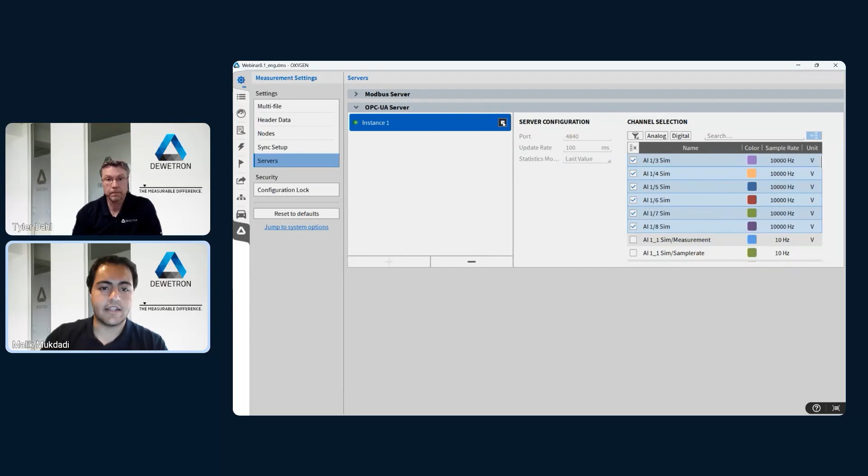Let me go ahead and get that server running again before I transition over to talk about the client features that we've integrated for OPC UA.

So here we have all of these channels actually being read in from the client side of things, and they are streamed in as if they were native Oxygen channels.

So we have a few key features here on the client side where you can set up the time to either be the client side or the server side time base. This is configurable. You can also set up the publishing interval, as you got from the server side of things, and be able to monitor whether the server is up and whether you have a good connection or not.

A couple of endpoint features for saving, loading, and exporting them. That way, if you have multiple systems you want to connect to one singular server, it's as easy as copy and pasting. There are also some security and authentication features on the client side, so if you want to be a little bit more careful about how to connect to the server, we have those options available for you.

And of course, more information on the channel selection, specifically the properties and the metadata that are available for those channels. So let me go ahead and show you how to set up an OPC UA client within Oxygen.

You'll go ahead and go over to the Data Channels tab, expand that out, and then from the bottom left where you have the Add Channel button - I have it favorited already - but if you search up and find the OPC UA client plugin, you'll be able to find where you can import or add in that software channel.

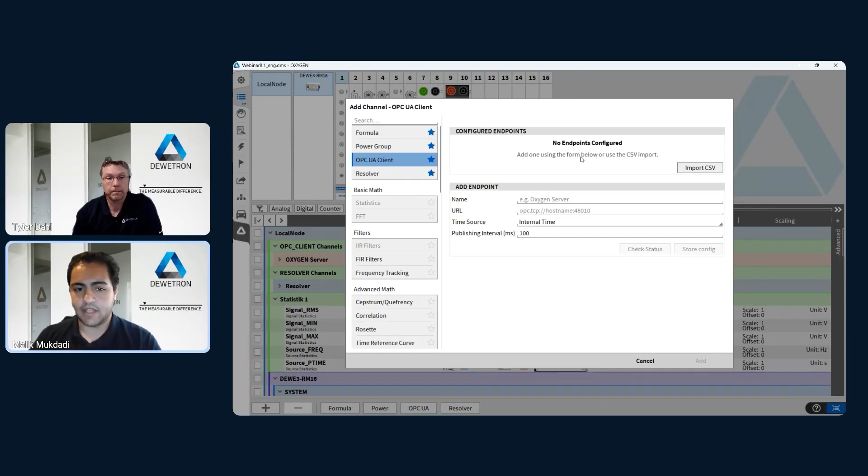Here you'll notice that I can already import a CSV for my configured endpoint, making it very easy for me to go from system to system and set up these endpoints very quickly on the fly. Or if I don't have one yet, I can manually add one myself.

So I won't go ahead and take time to type one in, as I've already had one set up here, and I'll go ahead and show you what it will look like after you add the channel.

So here I've configured it to the 4840 port that I had from the server, as well as setting up the time source to the internal time. So this is the client side time, but I can switch over to the reported time or the server side time. I've matched the publishing interval to 100 milliseconds, the same that I had on the server side.

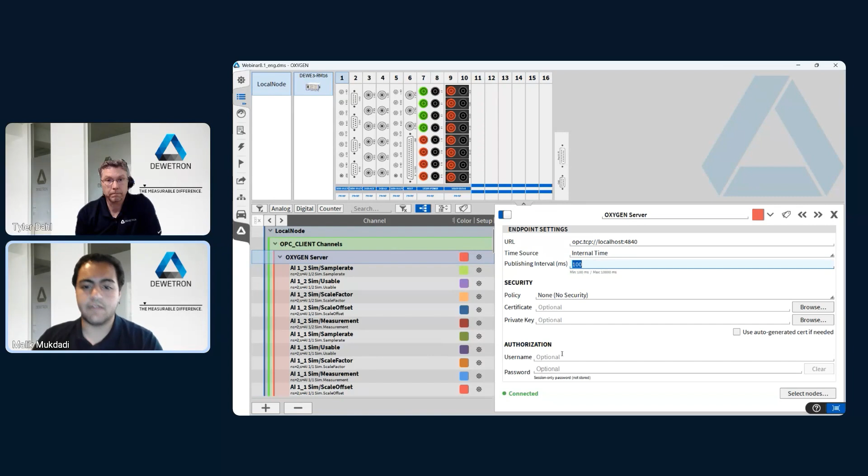And currently I did not implement any security or authorization, but these are options that you can implement if you have higher security requirements for your setup. You'll see in the bottom left here that I have a connected green status that shows me the status of the server and the client, that I do have that link there.

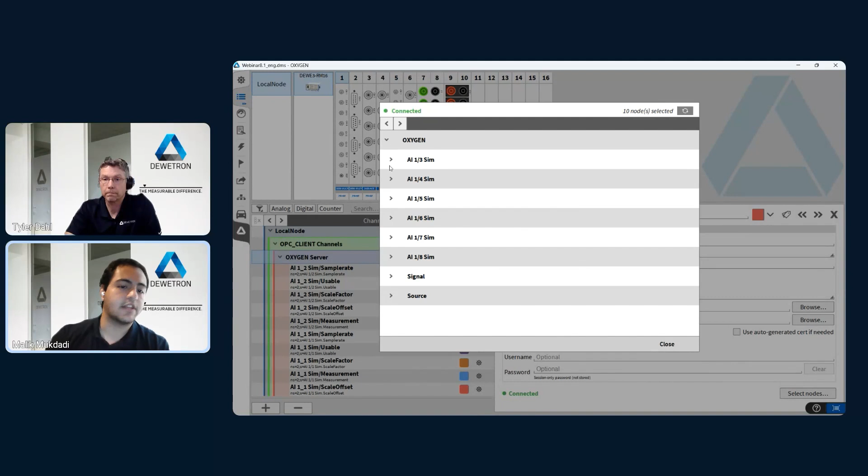And if I want to look into those channels a little bit further, I can expand out from the Oxygen. These are the channels that the server is publishing. I can look into that metadata, those properties of those channels as well, looking into the factor, the offset, the sample rate, and so on and so forth. So this is pretty exciting, seeing how we've set up both sides for the OPC UA server.

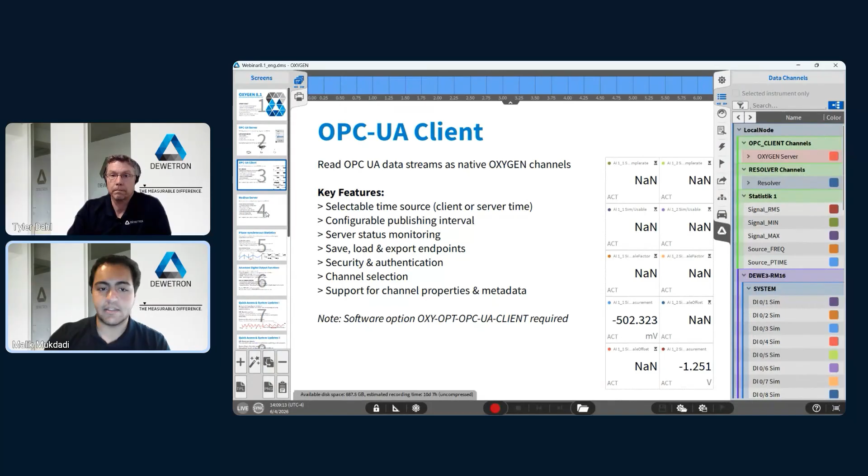We've decided to also set up, as you're familiar, we have the Modbus receiver that acts similarly to the client, and we've decided to add the Modbus server so that we can have both protocols fully supported within Oxygen.

So if you recall, over in the measurement settings, whenever I go to servers, you'll notice that I had the Modbus server already set up. And it's very similar to the OPC UA server in terms of the configuration and the channel selection tab over here, with a little bit of differences in terms of how I can configure my server.

So instead of having just a port, I also have an IP address for Modbus. I also have a buffer duration, so how long I want to wait, as well as a unit identifier, and I can save the config as much as I'd like.

One thing I would keep in mind is that the statistics mode for Modbus is limited compared to the OPC UA server, where we don't have the min-max RMS.

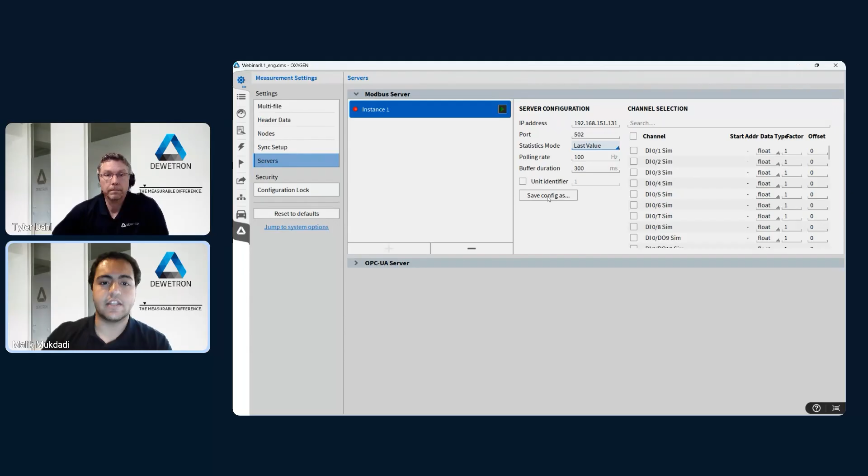We only have the last value and the average available to us for the Modbus server, so keep this in mind in terms of which protocols you want to go with for communication. We decided to offer both, as many clients from different industries utilize different types of protocols.

I think this really applies to a lot of different industries out there. Do you have any ideas, Tyler, on what industries would utilize these servers? With this extra added connectivity, pretty much any industry you can think of, even some industries that maybe we haven't traditionally been in the past.

For me personally, I'm really super excited about the OPC UA functionality. All of our Oxygen users, all the DEWETRON system users, are at some point sending information or data to their data people who are using an analytics package, a machine learning package, or something along those lines to analyze that data. A lot of those packages utilize OPC UA as a potential data connection. Now instead of having to export that data and move it manually, which is still pretty easy to do with our DEWETRON systems and Oxygen, now it's that much easier where you can actually live stream that data directly into those analytics packages.

I'm all about data, right? So being able to get that information into our Oxygen systems where you can have everything in one central location, which we're really good at, or out to other software packages that our users are currently utilizing as part of their everyday tasks. There's not an industry I can't think that this would fit into, honestly, Malik.

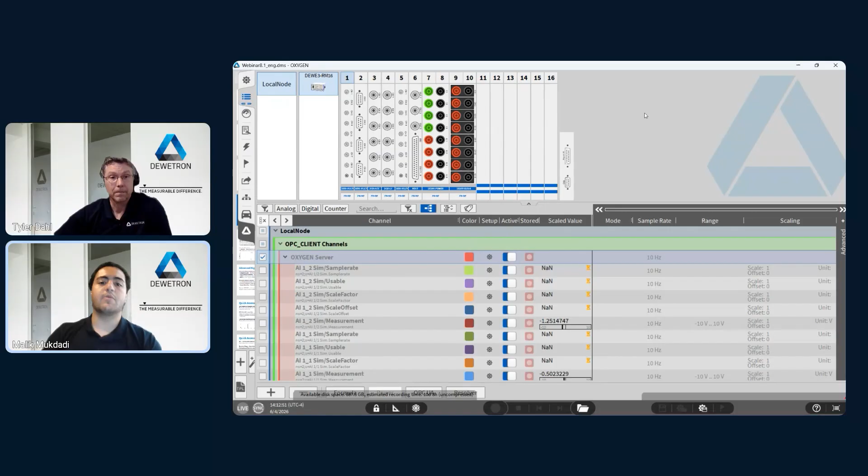That's really cool stuff, and that just shows even how much more powerful it is right there. So that was a great question. All right, so moving on.

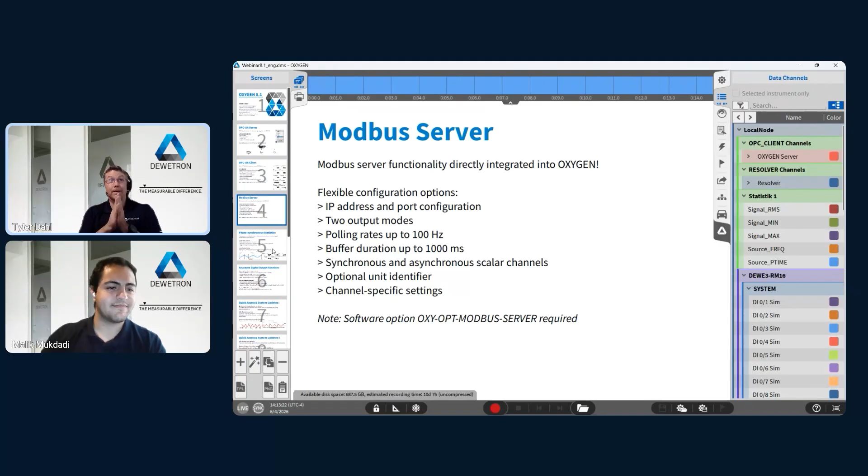Malik, why don't you tell us a little bit about phase synchronous statistical channels and also our extended digital output functions? Sure thing, Tyler. So we've decided to expand the calculations that we can do with our statistics channel. If you're familiar with that, we were using these channels to do various statistical analysis, averaging, RMS, rolling, and so on and so forth of channels.

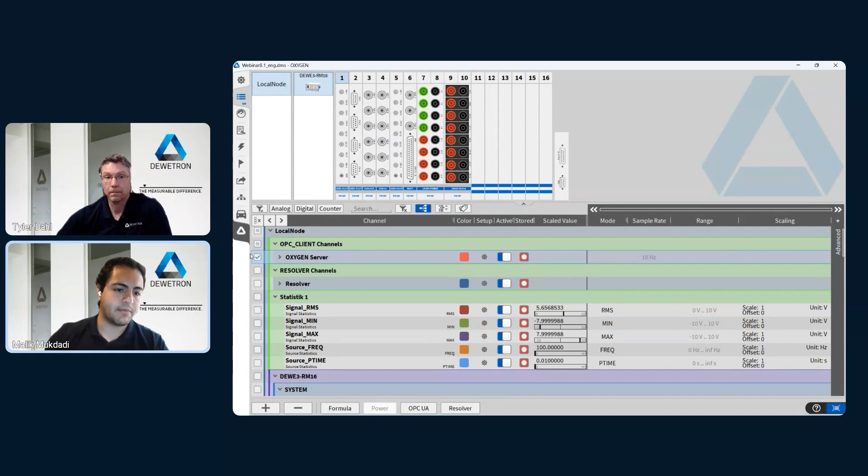We've decided to expand that over for these waveforms or analog signals that you may have, where you want to be a little bit more careful about their phases, their periods, or their frequencies, if you will. So let me just jump right into how to set that up. If I go over to my add channels, before that, if I go ahead and select an analog signal, say source, and I add a statistics channel for this...

You'll notice, if you're familiar with our statistics software functionality, that we've added two new statistics analyses. However, they are blocked off because they apply to phase locked measurements or phase locked calculation types. So what we've added here, along with all of our other calculation types, is that phase lock calculation type, where you can do all of these statistical analyses depending on the phase of that channel.

This includes being able to select a channel for the period source. In this case, I've selected my source channel.

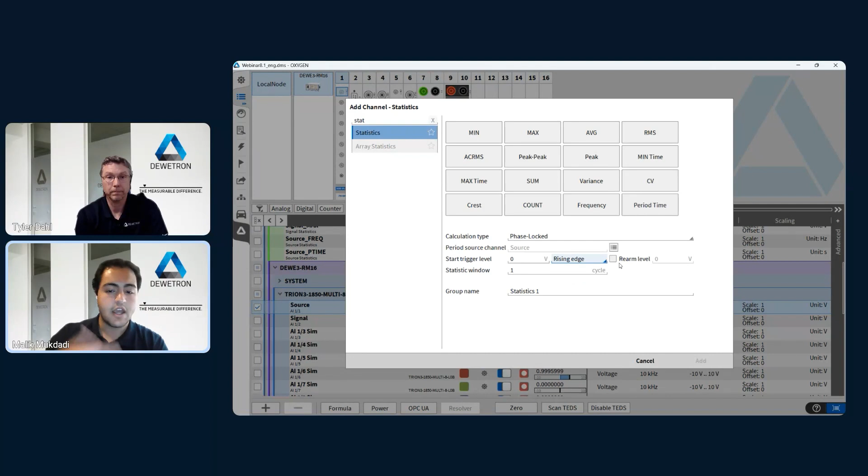As well as setting a trigger level, whether that's rising or falling edge, a rearm level for that. My statistics window, whatever calculations I'm doing, will be based off of the period or the frequency of that waveform or signal. I've already added one up here, and you can see that I can do my RMS, my min, my max, as well as read the frequency and period time for that signal.

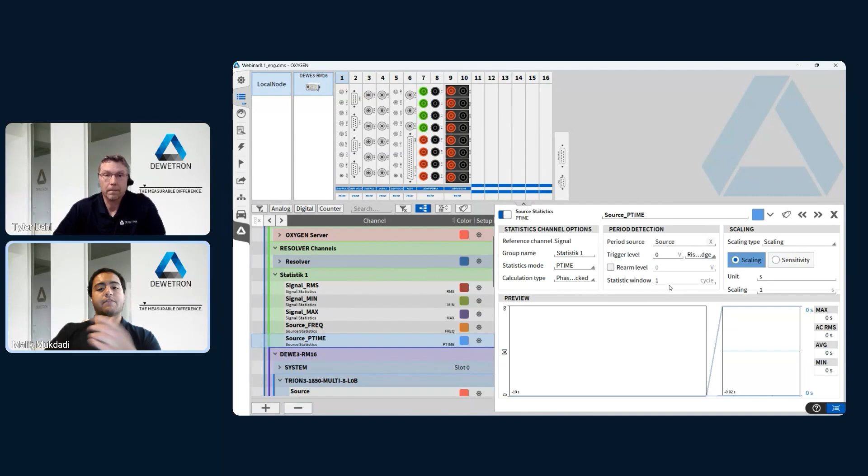And I can run that right now. I'm only running it off of one period, but if you're working with some noisy signals, some waveforms that aren't very steady throughout each period, you can do more of an averaging, if you will, across those cycles.

This is just a clock signal that you can configure from 1 hertz up to 10 megahertz. A PPS signal, so this is a 1 pulse per second signal. These are great for a few motors or a few sensors out there. We also have a dedicated clock 10, so this is a much more dedicated continuous 10 megahertz clock signal.

As well as some synchronization for IRIG-B. So if you're using IRIG-B to synchronize different systems, now you can import that or forward that signal as a digital output from your DIO on the chassis and be able to see that or visualize it as a software channel in Oxygen. We've also added the aux software channel pin available as a software channel in Oxygen, and this is where you can see that sync, the IRIG-B I mentioned previously, in Oxygen itself.

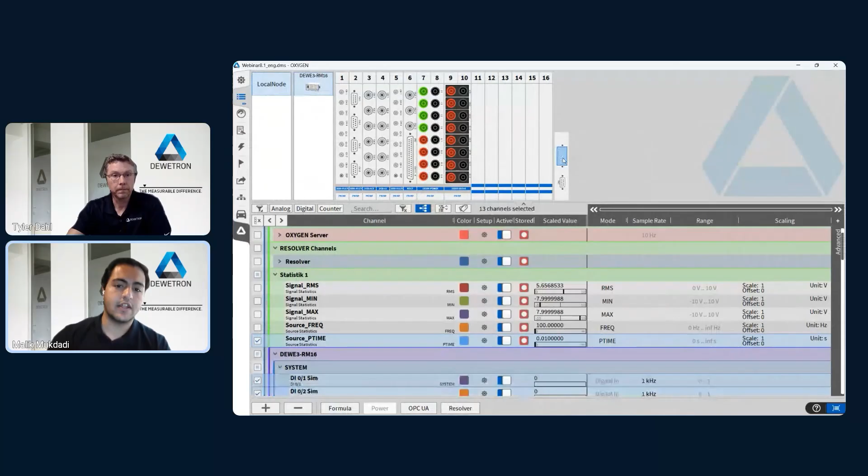So let me go ahead and show you guys what that looks like. If you go over to the DIO on the system here, you'll see that I have all my digital inputs, and then from my outputs, I've configured different modes for them. So if I go and select my setup, I can see that my modes have expanded from not just digital output, but to include those 4 modes that we've talked about.

Over here, you can see the aux channel. If I close my settings, you can see the aux channel down here with the IRIG. And if I had an IRIG signal coming in to the system, I would see that here as this channel. So now I can drag and drop it into my measurement screen very easily.

So these are the digital and analog functionalities that we've added onto our Oxygen software. I think these sound pretty cool, pretty interesting. What are your thoughts about this, Tyler? So I think it's awesome.

So with the phase synchronous functionality that we've added, we already had the ability to pull in frequency data or frequency information, but this makes it that much easier to find, making it part of the statistics channels. But also, I really like the fact that you could smooth it out now.

As a native property of our hardware, because it is such high quality hardware, especially with high speed, highly granular data coming across, you're going to get chatter, you're going to get movement across that. You're going to pick up everything, which you may not always want because it can be a bit of an eyesore to see that chatter as it's going around that main frequency you're trying to pick up. So this allows you to really smooth it out, to make it a little bit easier to work with, and better to look at as you're going through your testing.

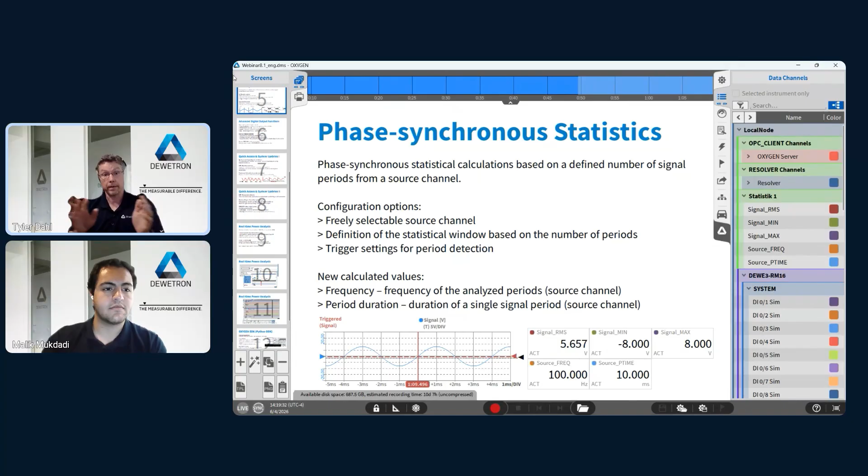And then with the digital out enhancements that we've made, this is also very cool. So now we have the ability to essentially propagate timing signals further down the chain through our system. Our systems will natively synchronize with themselves via our Oxygen Net features, but now you can actually propagate that same signal that our DEWETRON systems are utilizing to other third-party systems. So say, for example, you only had one IRIG connection.

Well, you can plug that into your DEWETRON system and then use that DO port to actually propagate it out to the next system, a non-DEWETRON system that would need that timing to synchronize those external sources with our system. So really cool stuff, and even the ability to create your own sync signals or output signals.

That's really cool too. Our team does an awesome job putting these updates out, and I'll say it again every time: Oxygen is for the user, by the user. This is all based upon your feedback. So what you tell us is what we implement into the software, what you need we try to implement as much as we possibly can. So if you ever have a feature you'd like to see implemented, improved, or tweaked, do not hesitate to reach out to us. We love to hear from you, we love that feedback, and we'd love to implement it even more.

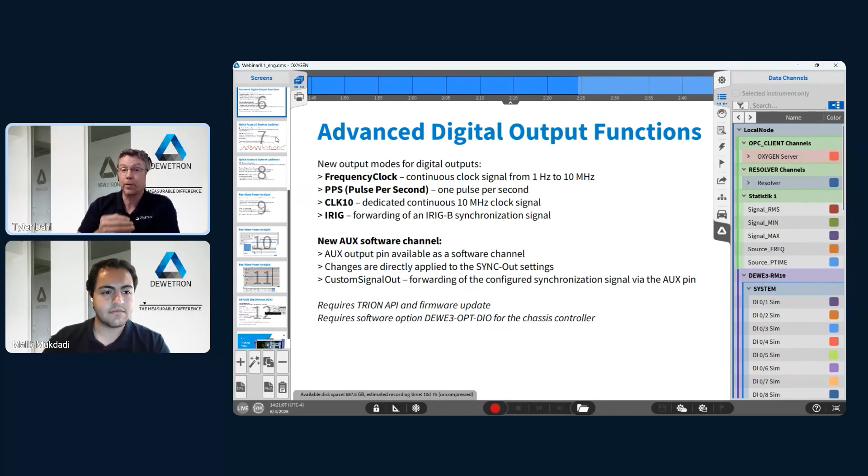So, Malik, now we're going to talk about some of the improved quality of life features we've added to Oxygen. And are you going to tell us about real-time power yet? I think I'm going to leave that for dessert a little bit later. We'll get through the quick access stuff first, and I really want to end it with a bang with that real-time power analysis. So stay patient with me, and we'll get there. Let me just hop right into it.

We've added a couple of miscellaneous quick access and system updates. Like Tyler said, Oxygen's for the user, by the user. We really want to make sure that as we continue adding all these new improvements, new ideas, new plugins that can be utilized for more complex applications, we keep Oxygen itself simple enough to interface with, so that it's more intuitive, giving you more of those 'that makes sense' kind of moments.

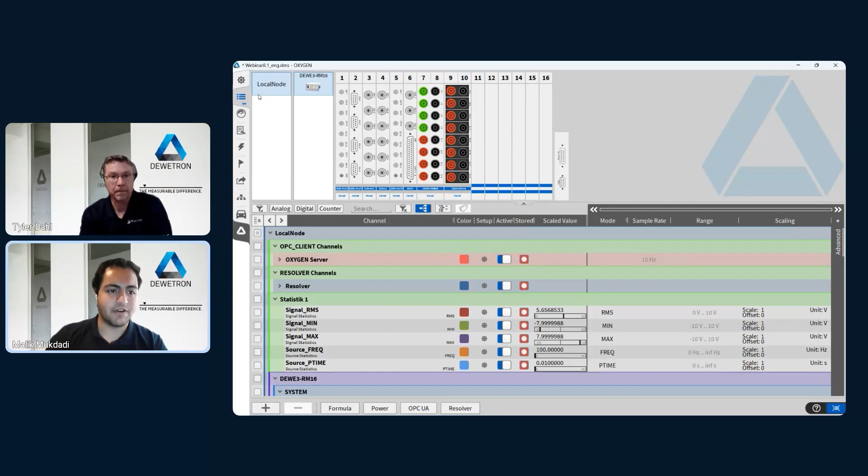So the first thing we've added, and honestly, as an application engineer using Oxygen every day, this might be my favorite: a quick access for those frequently used calculation channels. Every time you go to the add channel menu, you always have to hit the add button and then look for whatever plugin or calculation you want to do. However, if you favorite up to 4 channels or 4 calculation plugins, you will see them show up at the bottom of the channel list. So for me, whenever I'm working, I really want to keep up the flow. If I want to add a lot of formulas back to back, I now have the option to configure this quick access, this quick button that I can just click and keep moving forward. Really big for somebody who uses Oxygen very often, I like this addition a lot.

We've also now added more support for SCPI, specifically in the number of connections we can hold through Oxygen. Previously it was very much a single connection, host to client. Now we've expanded that into parallel connections where you can have multiple clients to a single host. This is really useful for those who might have automated testbed systems, multiple systems going on, or if you're even using OXYGEN-GO and want more of a monitoring and measuring at the same time to one consolidated host. We're now able to support that with the release of 8.1.

Another thing we've decided to add: if you work into the measurement screen heavily and don't like to jump back and forth, especially using recorder instruments, we've decided to display the absolute or relative time directly within the instruments. We've been expanding a lot more on the functionalities in the measurement screen and how quickly you can get the information you'll find useful. Previously you'd have to go to the recorder and look at the time format separately, and now that's integrated there. To make sure you see that time format, make sure that whenever you're setting up your recorder instrument you have the show time format button selected.

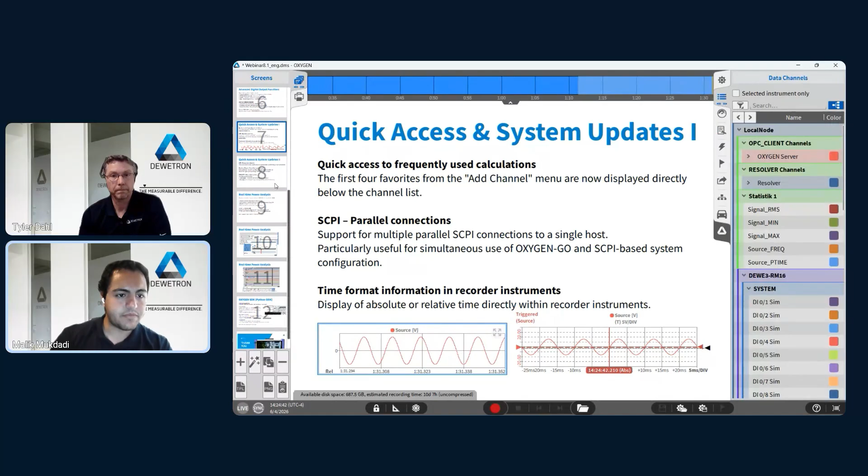We've also added a screen lock behavior. So if you're setting up an XCP connection and getting it established, now the screen lock is automatically disabled. This is a nice one for those who use XCP often. And then for our resolver plugin, we have now added a configurable filter length.

So if you're working with that velocity angle for maybe a rotating shaft, you want more of an improved signal quality, something more of a smooth speed output. This is what that filter length really helps out with.

And then, as you saw with the Modbus, we supported output modes for last value and average. We've decided to apply this for CAN out as well, so it didn't feel alone. So now we have these output modes for CAN, as well as the smooth speed output for the resolver.

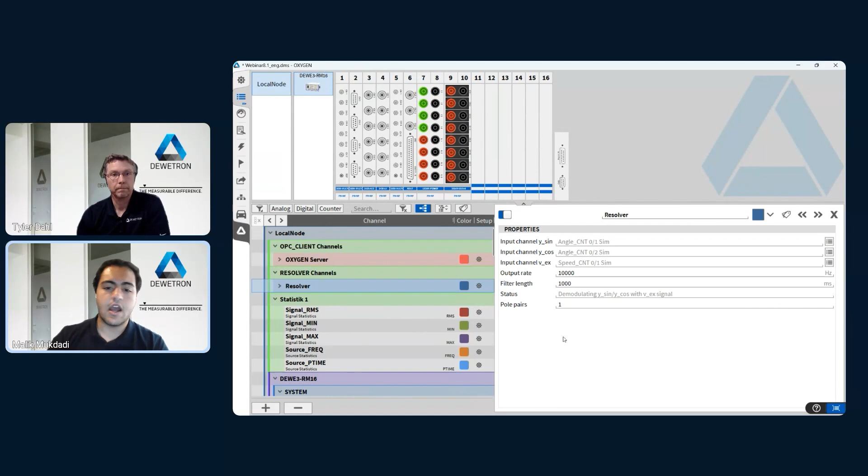So I'm going to show you really quickly what that looks like. Here I have a resolver plugin already set up, and you'll notice that along with my other property options, I now have a filter length up to 1000 milliseconds that I can set up. So that helps me achieve that more smooth speed output.

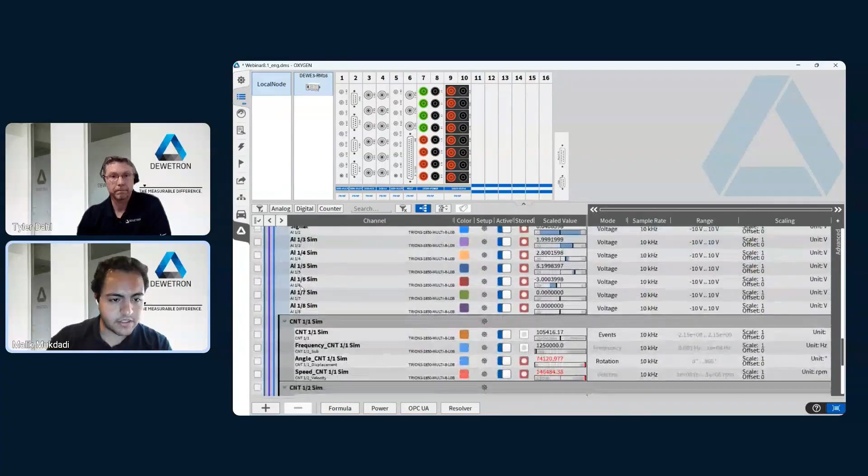And then if I go over to, say, a CAN signal, let me find it here. Oops, scrolled right past it. Now I can either look directly into my CAN signal, and I'll see my output mode there, so I can select between average or last value. Or if I just go to my messages and signals, I can look at my signals in here and see the output mode there as well.

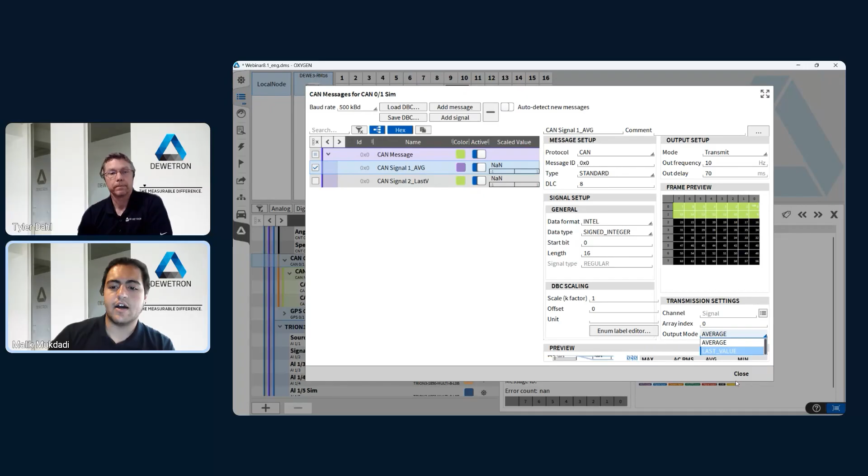So yeah, these are some nice quick access options. These are very much more user accessibility updates that we've made. I think this makes Oxygen a lot more intuitive, a lot easier to use.

What are your thoughts about this, Tyler? I love it. Especially one thing that I really like about this feature set that you just talked about is the parallel SCPI ports.

So everyone on here should know, we just released Oxygen Go, which is our mobile app that allows you to view your test data and even control your test rig from your cell phone or from your mobile device.

Before, we only had natively one SCPI connection, and that app, if you were utilizing it, would essentially consume that connection. You had the back and forth because that's how the app communicates, via SCPI. Well, now with this parallel connection, you can utilize the Oxygen Go app and still utilize that SCPI connection to external devices to pass and receive data or commands, which is huge.

And even so, if you wanted to use a DEWETRON system as a more powerful kind of controller, now you can actually utilize those SCPI connections to multiple sources. So you can send one connection in this direction to this device, and send the other connection to a completely different device. Just a bunch of really cool stuff there.

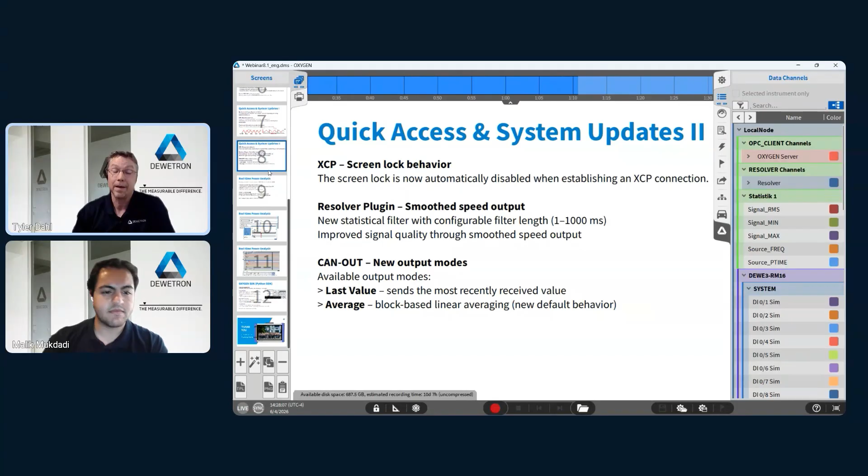And of course, like Malik said, from the engineer's perspective, just being able to favorite and have directly there at the bottom what you're looking for, your most commonly used tools. So all of that is really cool.

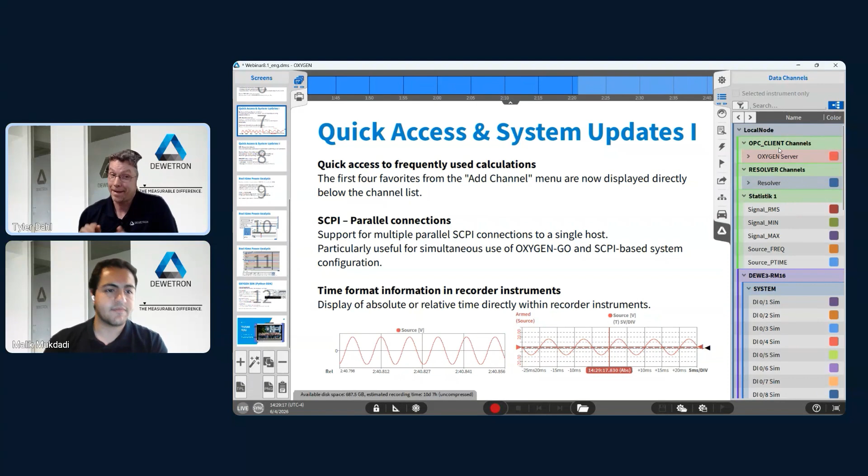All right, Malik, now can we hear about real-time power? I think I've held back enough. I'll just dive right into it if that's okay with you. Go for it. All right.

So we have now expanded our Power Groups functionality to include the capabilities to do real-time calculation. If you're familiar with our Power Group before, we would take in voltage and current inputs, couple phase inputs, and utilizing those, we were able to calculate power factor, see the waveform data of input channels, and we had some expanded functionality that we included as well.

Such as DC power values, being able to see mechanical power efficiency, so on and so forth. We have now drawn that over to real time with some key things to keep in mind if you want to utilize this. So to make sure that we don't have any bottlenecks when we come down to wanting to get this real-time analysis, we have released this onto the Oxygen version on Linux, specifically due to the caveats that come in between the two operating systems.

As you may be familiar, Linux itself is a much more lightweight, less intensive operating system software-wise when compared to Windows. So therefore, it's a lot faster, has typically less latency as it's not spending so much time on the processes and background software operations that you might have noticed if you use Windows often, right? No annoying updates coming up out of nowhere. This is specifically on Linux on the Ubuntu 24.04 distribution.

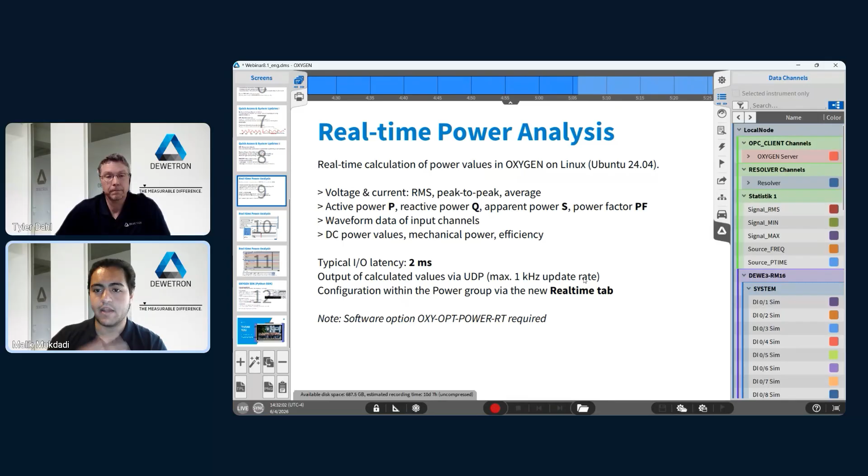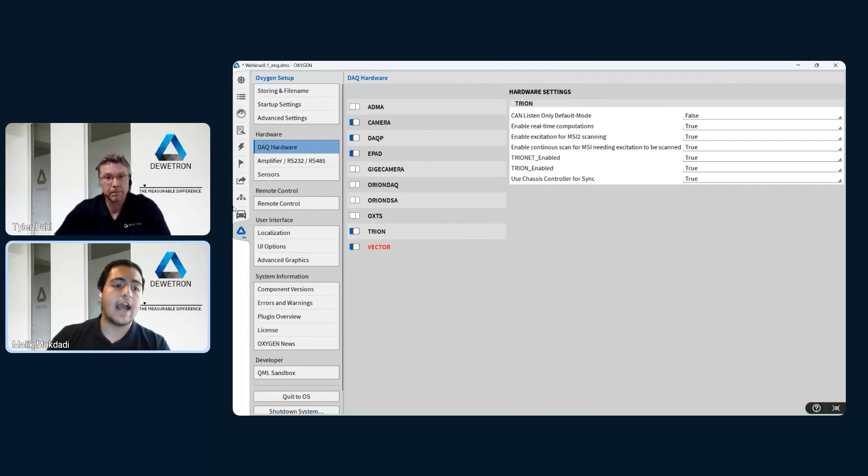So let me show you what that would look like. First and foremost, before you go and jump into making a power group, be sure that you go over to your Oxygen setup. Over in the DAQ hardware setting, you'll see that there is an enable real-time computation setting. Make sure that this is set to true, as it sets the hardware to be prepared for all that real-time calculation, or real-time just grabbing those samples so that it can keep up with the real-time calculations.

And then when you add your power group in, you'll notice over in the settings section for that power group, along with the advanced settings, we have harmonics, flicker efficiency. Now we've added real time. So you can enable your real-time calculations, set up the cycle rate, set up the averaging across the period.

So how many periods that you want to average across, set up the UDP output. So of course that will include the IP address or the port to connecting to that, and then the actual output channels that you want to interface with. So that's not only just the voltage and the current, but the calculations of the power, the efficiency, so on and so forth.

Once you add your power group in, you'll notice then that you will have two sets of power groups, one of the normal set that you're most likely familiar with already, and then the new set of the real-time groups that you see over here. So you still have access to both the normal set as well as the real-time set, so you can utilize both for your purposes or for your measurements.

I do want to keep note of the fact that this applies for all of the wiring types except for the other wiring types. This is because the open-endedness, the nicheness of the other wiring types and being able to support up to 9 phases has kept it, we have kept it to only being applied to the default setups that we have here.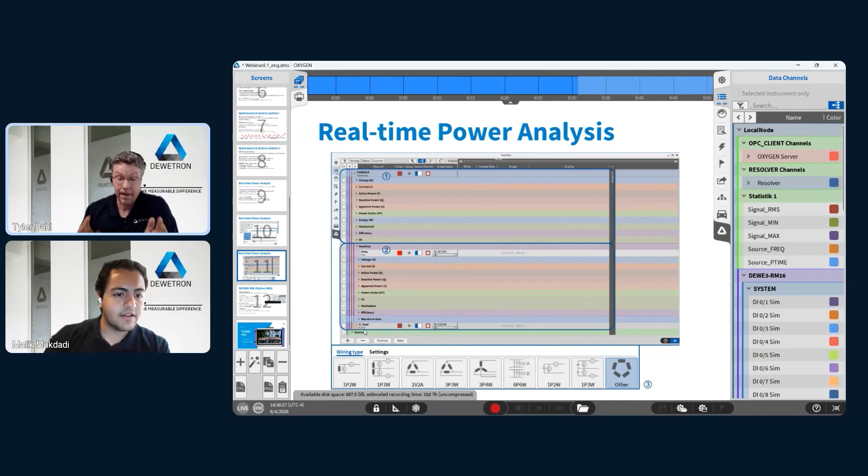So I'll wrap it up with some more of our software capabilities that we have implemented, specifically about our SDK. If you're familiar with Oxygen SDK, it is the capabilities that we have added to keep Oxygen very open-ended, very modular, so that you can come in with your own custom requirements and interface with it to achieve what you need to achieve with the hardware that we provide.

And we have decided to expand that outwards laterally into other programming languages, specifically Python. So we've now brought in the core capabilities that you normally have with the C++ Oxygen SDK, now in Python. This includes being able to register new channel types, so whenever you go to the Add Channel dialog, you want to make your own plugin, your own calculations, that's there, capable for you.

You can add output channels with custom properties. So if you want to make a calculation in a certain type, you want to output it so you can interface with it with a third-party external system, or in some specific format that you'd like, this is a possibility as well. You can even customize the channel detail pages. With QML, you can make sure that it looks nice, the UI really fits your need. And of course, that includes the property names, the UI text as well.